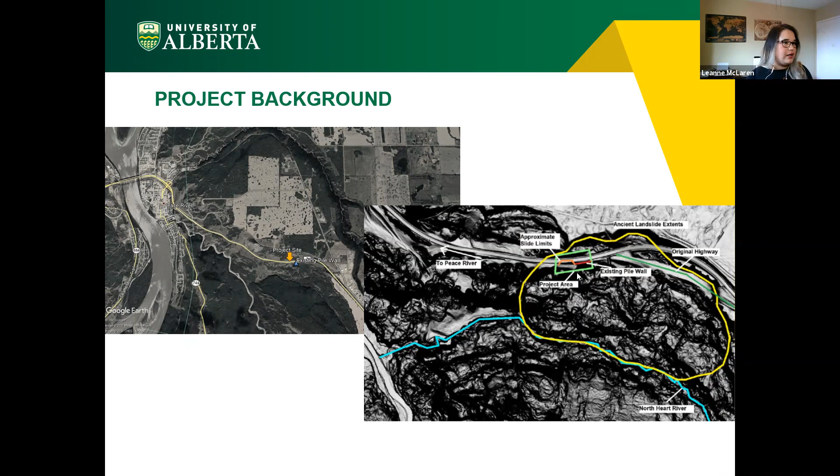These photos were taken in 2016 of the existing cantilever pile wall. In the photo on the right, you can see the slope inclinometers both upslope and downslope of the wall. You can also see that the soils in front of the wall have been creeping downwards little by little.

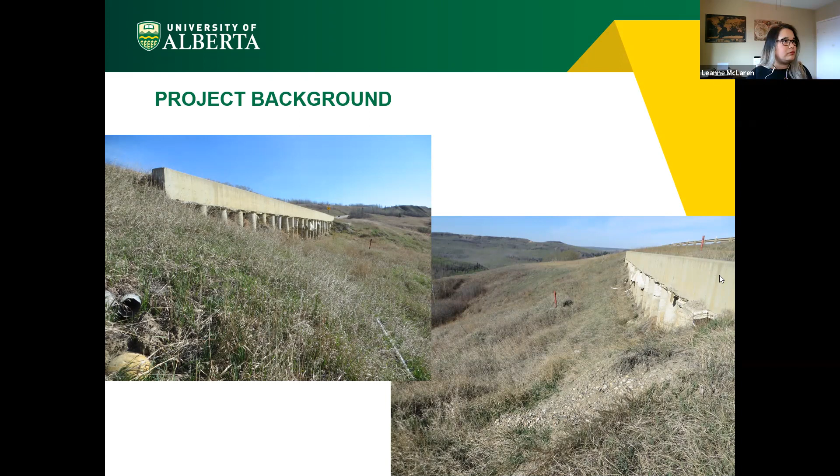Fortunately, or unfortunately, because of the active movement of this slope, there's plenty of instrumentation data dating at least to the 90s. In this zoomed in site plan, you can see the orange line is the existing cantilever wall, and some instrumentation was installed west of the wall in 2010 here.

You can see in the slope inclinometer plot on the right, which shows cumulative deflection on the left and incremental deflection on the right, that there's a distinct slip plane at about 6 meters depth in SI 10-4, which is highlighted in yellow here on the left. So you can see that jumping out right there.

Many of the SIs installed between the 1990s up to 2014 showed slip planes between 6 meters and 18 meters depth, and some were sheared off at these depths, with maximum deflection rates as high as 87 millimeters per year before they were sheared off.

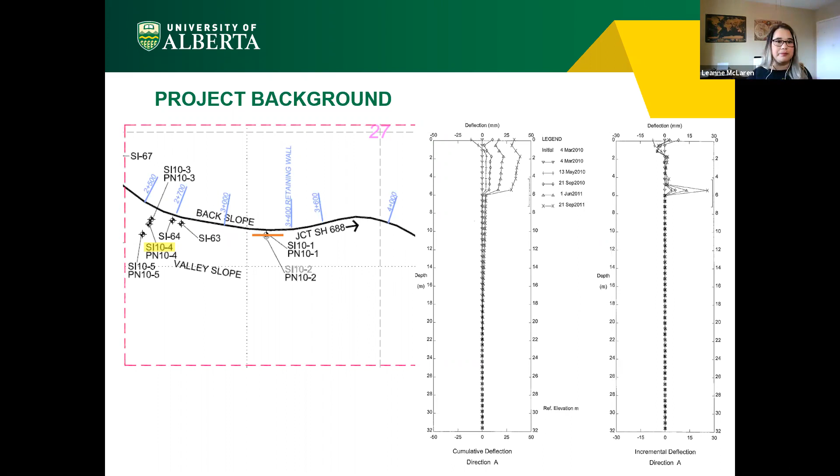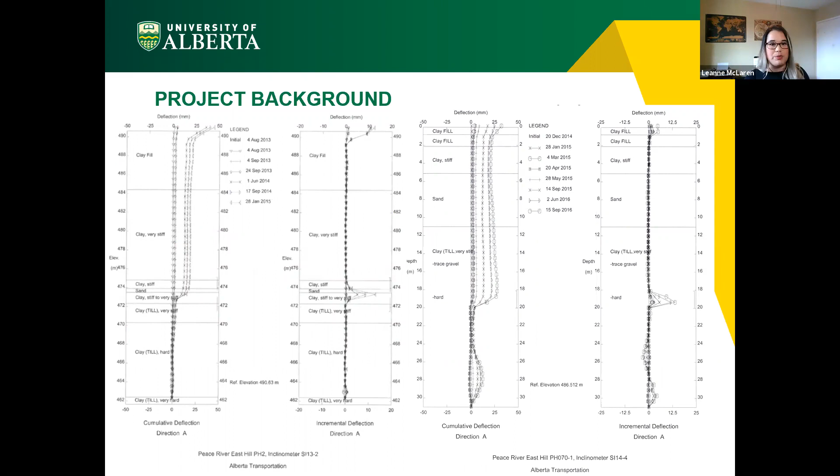Here's a couple of other SI plots prior to construction. The one on the left is SI 13-2, which was just upslope of what would become the new wall, and the one on the right is downslope to the west of the section of wall I'm looking at. Both plots show a potential slip plane at around 17 or 18 meters depth.

With instrumented evidence of continued slope movement and cracks and dips being noted in the highway during the annual geohazard inspections, it was decided in 2015 to build a wall to protect the highway from the slope movement.

The picture on the right is a little dark, but you can see in both of these pictures several longitudinal cracks running along the highway, caused by loss of embankment support on the downslope side. If this wall wasn't constructed, the highway would continue to be affected by the slope movement.

Three geotechnical investigations were carried out between 2010 and 2014 to determine soil conditions and possible causes of the slope movement. Generally, the stratigraphy followed the log shown here, starting with embankment clay fill on top, over medium to high plastic lacustrine clay, over varying thicknesses of silty sand, which was on top of very stiff glacial clay till.

Several holes encountered colluvium at the surface, which makes sense considering the active slide terrain. As with many of the landslides in the Peace River Valley, the slip surface was found to be between the high to medium plastic lacustrine clay and the very stiff clay till layers.

The water table was generally 9 to 10 meters above the assumed slip surface. So water pressure on the slip surface could speed up weathering, as well as the loss of cohesion in the clay materials, and could provide lubrication along the slip surface once it was formed.

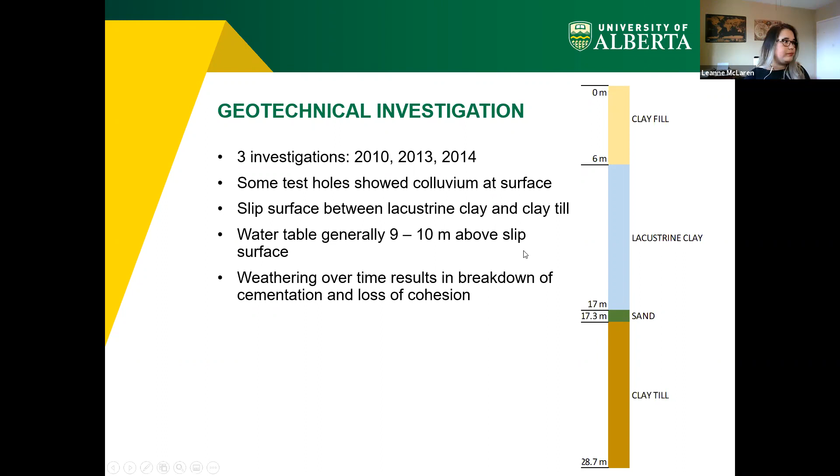During the preliminary engineering phase, SlopeW, the limit equilibrium software, was used to estimate the lateral resistance required in the wall anchor system to increase the slope to an acceptable factor of safety. This lateral resistance was then converted to an equivalent lateral earth pressure with a triangular distribution, as shown here to the left of the wall, acting above the slip surface on the back of the wall.

This earth pressure load would be resisted by the passive earth pressure in front of the piles and below the slip surface, based on an ultimate resistance of 1600 kPa in the high plastic lacustrine clay and 2500 kPa in the clay till. The piles and anchors themselves were designed by another structural engineering firm, so I wasn't privy to all of the details or parameters used in design, except for these values shown here.

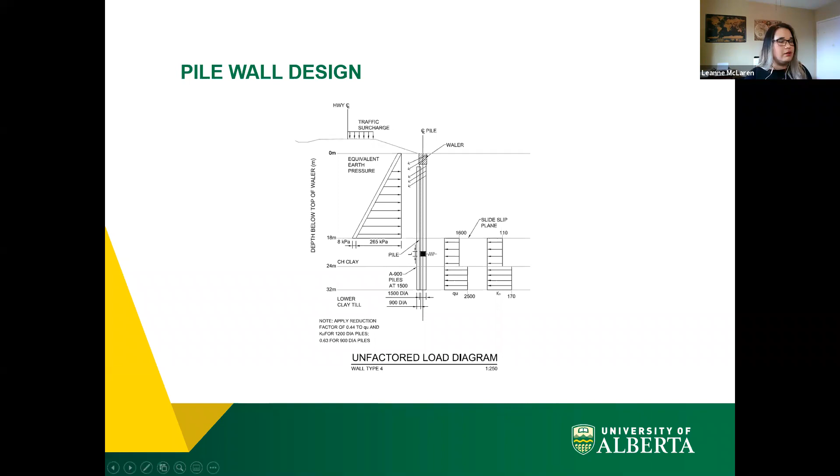So now I'll tell you why I keep saying section 4. The wall was designed in 6 sections in total, with varying designs based on depth to slip plane. There were so many different aspects that went into the design of each section, so I focused my project on section 4, which had the deepest slip surface, the most robust pile design, and the most levels of anchors.

The anchors were 32 millimeter diameter high strength threaded steel stressing bars with a 12 meter long bond zone and varying free stress zones, so that the bond zone was beneath the slip surface.

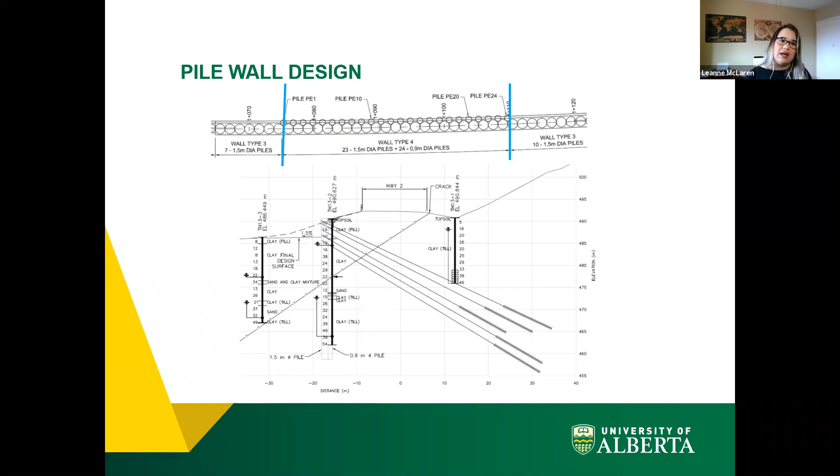Service loads were designed to limit deflection of the pile head to 50 millimeters or less. Some deflection was anticipated during construction as the soils in front of the wall were excavated and the anchors were locked off.

The soil in front of the wall was excavated in benches so that each row of anchors could be installed and locked off prior to excavating to the next bench. After all 5 rows were installed and locked off, the soil was backfilled to cover the lowest row of anchors.

You can see in the photo on the left, the soil has been excavated down to the 5th level of anchors. To the right, they've backfilled it to cover that 5th row of anchors, which would be the final grade. You can also see in the middle the instrument monitoring station here.

All of the instruments installed within the piles and the pile wall were wired into this data logger, which is powered by a battery and solar panel, so that taking readings at the biannual geohazard inspections would be a simple download from this station.

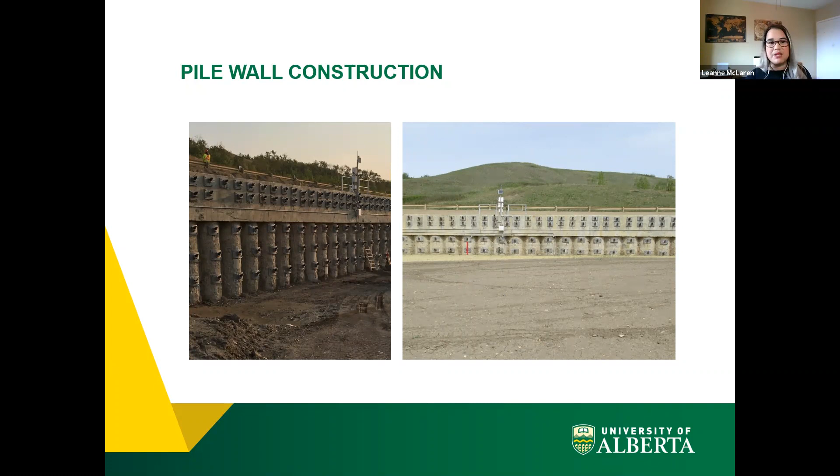Between 1996 and 2015, 29 different instruments were read annually to assess the condition of the slope movement at this site. This includes 12 slope inclinometers, 3 of which were sheared off shortly after installation, 15 pneumatic piezometers to measure groundwater levels, and 2 standpipe piezometers. There were more SIs installed prior to 2010 in this area, but they had been sheared off or damaged.

During construction, several instruments were installed in pile P74, which is roughly in the center of wall section 4. 28 vibrating wire strain gauges were installed as shown in the photo. We've got 14 gauges on the upslope side of the cage and 14 gauges on the downslope side of the cage. The PVC conduit here is where the SAA, or Shape Accel Array, will be installed after casting of the pile.

The strain gauges would measure microstrains along the pile between 0.2 and 28.2 meters length. The SAA would measure deflections in the pile similar to a slope inclinometer, and a vibrating wire load cell was installed on each anchor to measure the loads on each anchor during and after construction.

All of the instruments were read during construction as part of the observational approach to determine whether or not the pile and anchor designs were behaving as expected or if the design needed a little bit of tweaking. Since completion of construction in 2017, the instrument data has been downloaded twice per year. However, since the instruments are connected to the automatic data logger, this gives us daily readings for each instrument.

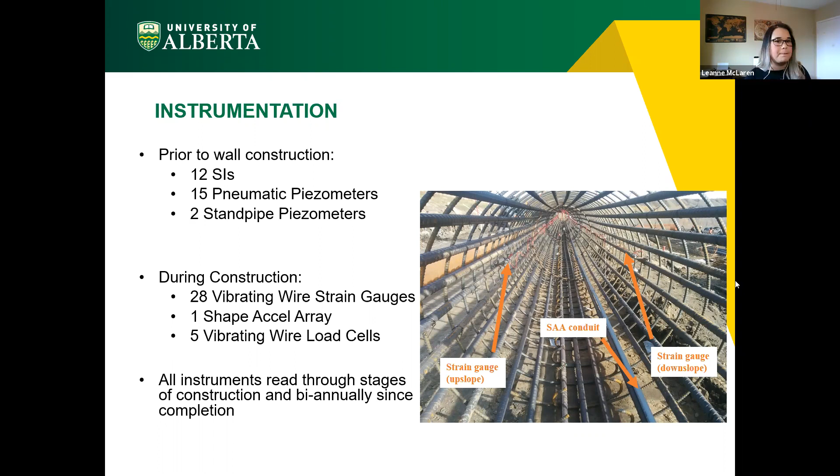I'm now going to show you the instrument data that was collected during and since construction, and look at how it compares to the expected performance of the wall during design. I'll start with slope movement as measured with the slope inclinometers and Shape Accel Array. I'm sure many of you are familiar with these instruments, but for those who are not, I'm just going to give a brief description of what they are and what they do.

On the left is a picture of the slope inclinometer system. A PVC casing is installed into the ground with its bottom lower than the slip surface. At the time of reading, the probe, which is the long metallic thing on the bottom, is connected to the cable and lowered to the bottom of the hole, with the wheels following along grooves in the casing. During casing installation, the grooves would be aligned so that they point in the direction of the highest slope movement. Once the probe is at the bottom, it's pulled up in increments. Some SIs come in 0.5 meter lengths, and the one we use on this project is 2-foot increments.

In each increment, the probe measures the tilt of the casing. These measurements are sent to the handheld data logger unit and stored, and this process is repeated until the probe is at the top of the casing. Then it's lowered again 180 degrees to the first reading, and the process is repeated. Knowing the distance between measurements and the angle from vertical, the horizontal displacement is derived.

The Shape Accel Array, shown on the right, or SAA, is a series of rigid sections of constant length that's permanently left in the hole. Each section can move laterally, but they can't twist, and they have gravity sensors that can measure tilt in the X and Y directions. The X, Y, and Z position of each segment is calculated so that you can see the overall shape of the array, similar to an SI plot.

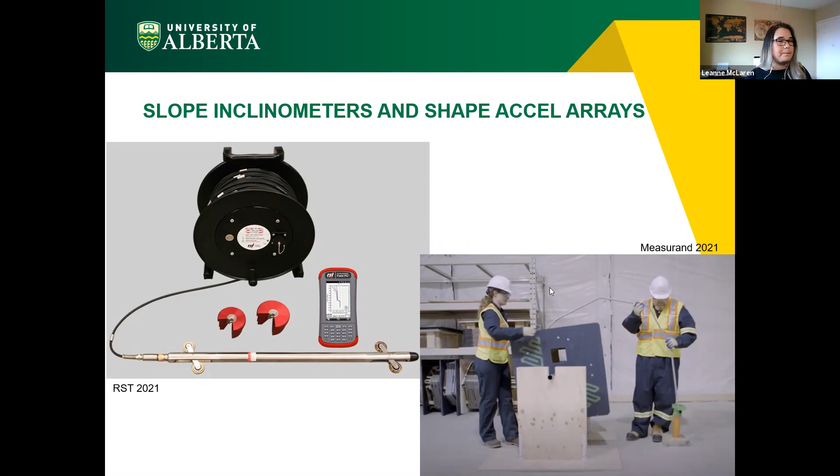The SI plot shown here is from test hole 13-2, which is highlighted in the picture on the left, prior to construction of the wall. From this plot, there's clear movement between 17 and 18 meters depth, near where the lacustrine clay interfaces with the clay till. The maximum incremental deflection at this spot plots at nearly 25 millimeters downslope.

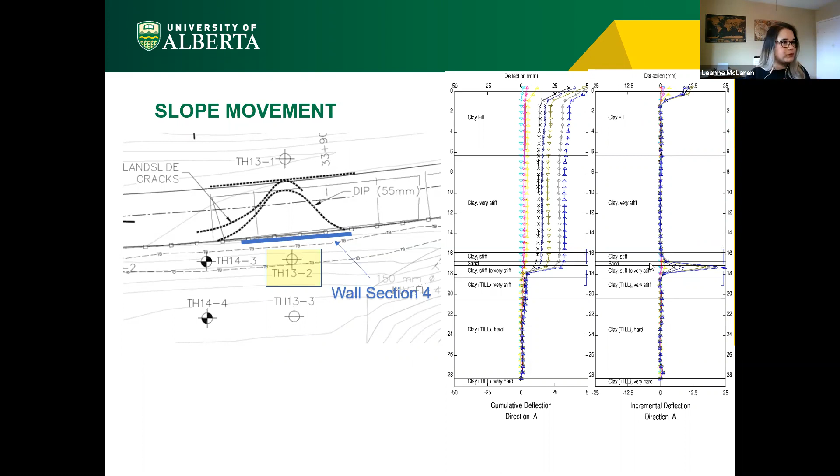This plot shows the change in measured displacement over time in test hole 14-4 at the slip plane elevation, which is just west of wall section 4. In this plot, the displacements are shown to increase steadily from January 2015 to June 2017, which corresponds to the time of anchor installation and lockoffs in June 2017. The deflection rate levels off between June and September 2017 as construction is completed.

Then it starts to increase again, but at a much slower rate between September 2019 and September 2020. The significant slowing of deflection rate in an SI downslope of the pile wall suggests that the pile wall has reduced the driving force on the portion of the slide mass that is downslope of the wall. Some creep is still going to occur, shown by the gradual increase of deflection with time, but the wall is expected to protect the highway, which was the main concern for this project.

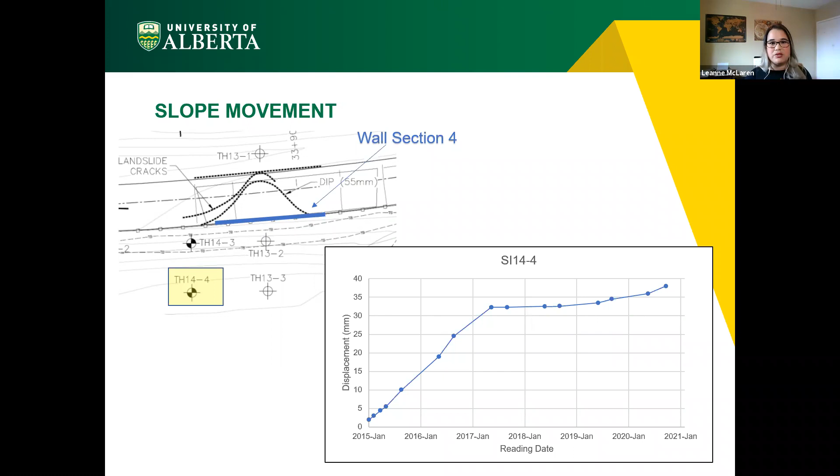This is the SI plot for the same SI as the last slide. In the cumulative plot on the left, if you look closely, you can see the red arrows here. This shows a big step of displacement between September 2016 and June 2017 when construction was taking place. Then you see all of the lines sort of on top of each other here, showing that the movement ceased, or at least slowed down significantly, until between September 2019 and June 2020, when displacement started up again, but more gradually.

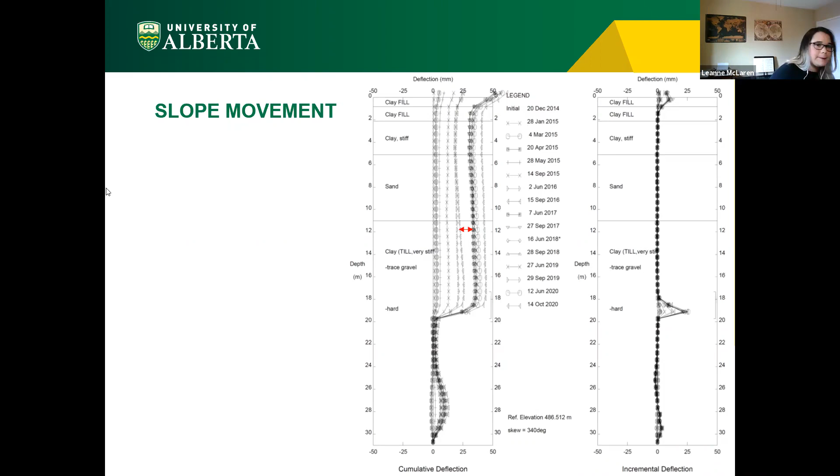Over the period after construction leading up to 2020, some redistribution of the loading had occurred, reducing the pile deflection to 7 millimeters towards the highway and increasing the deflection near the slip surface to 7 millimeters downslope. These deflections are well below the serviceability limit of 50 millimeters of pile head deflection.

I should note that an SI is encased in soil, so it's going to have a different response to slope movements than the SAA, which is encased in concrete. However, this does show the pile deflections are within acceptable limits.

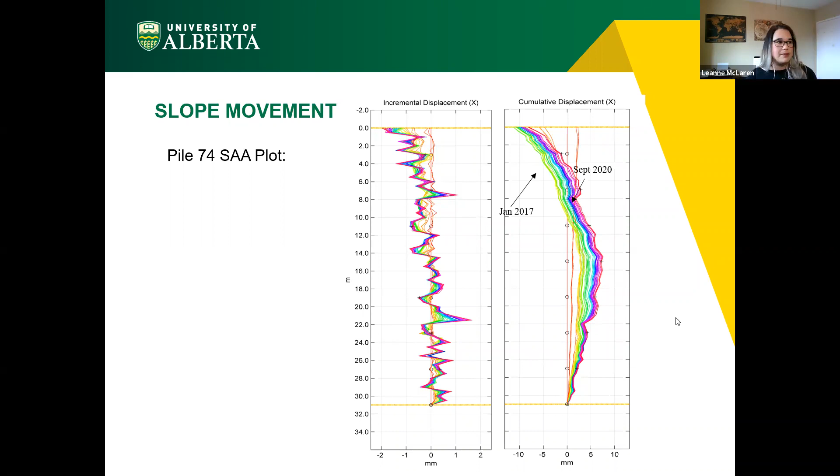Strain gauges can provide a few data sets. Total strains show the actual microstrain at each instrument. Bending strains are the changes in strain between the current and original readings. And the bending moments can be calculated from the bending strain using the flexural stiffness of the concrete.

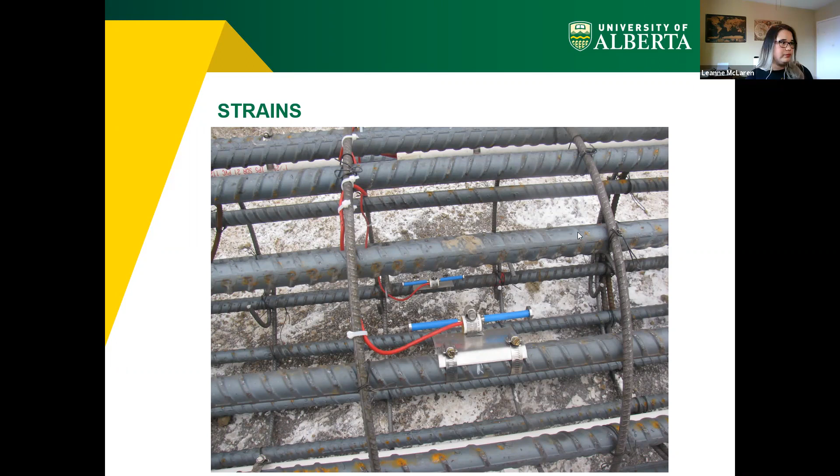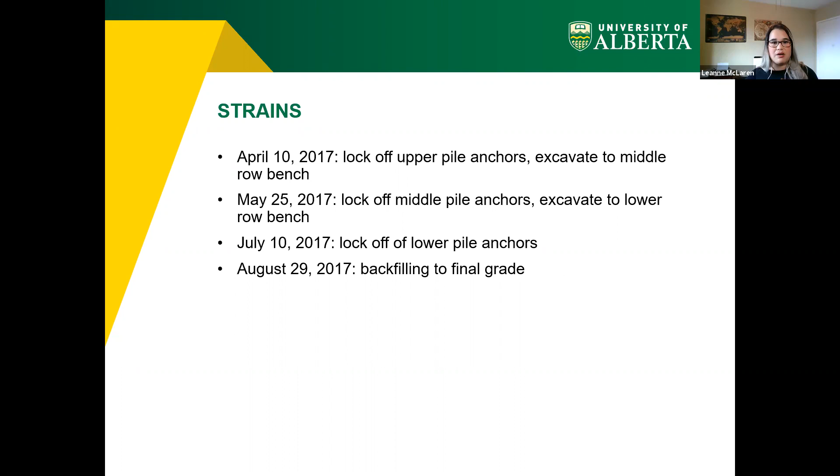So I selected specific dates to look at the strain gauge data so that I could see how certain events were affecting strains in the pile. April 10th, 2017 was immediately after the upper pile row of anchors were locked off and excavation to the middle pile had begun. May 25th was after the middle row of anchors were locked off and excavation to the lower row began. July 10th was after the lowest row of anchors were locked off, and August 29th was when backfilling to final grade was underway.

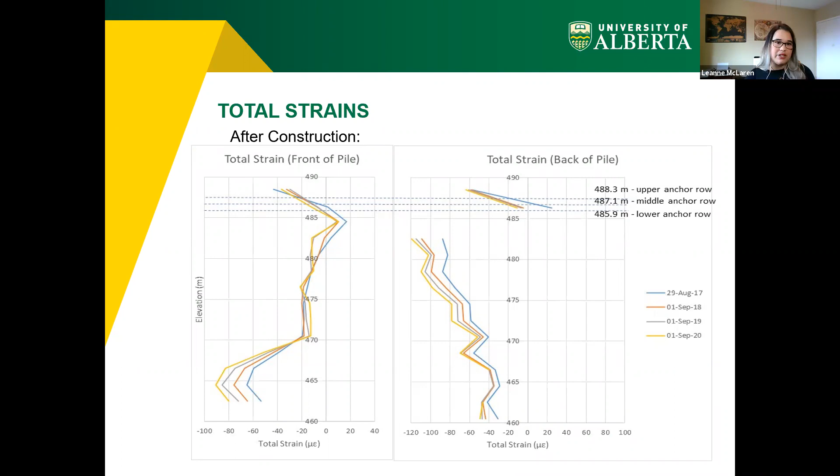These plots show the total strains after construction. Unfortunately, one of the strain gauges near the anchor elevation stopped functioning during construction, so we're missing some of the information here. But looking at this plot, the total strains starting at the finish of construction in August 2017 to our last reading in September 2020, the tension at the anchor elevation is continuing to decrease at the back of the pile, just below the anchor elevations. The strains appear to be gradually increasing in compression.

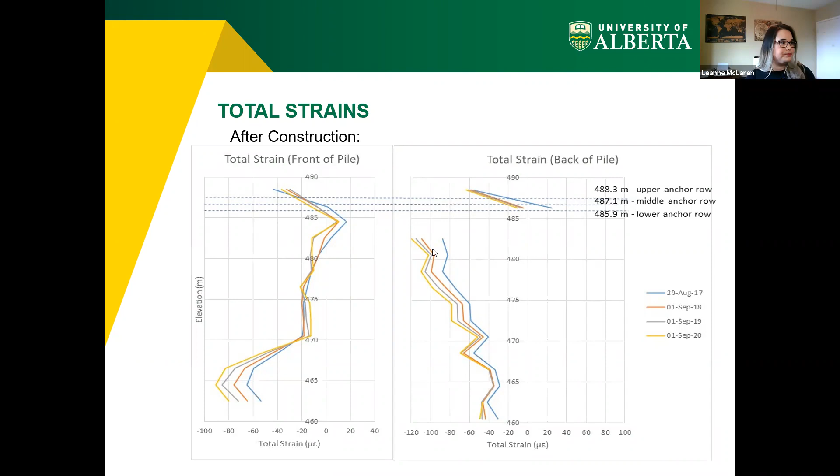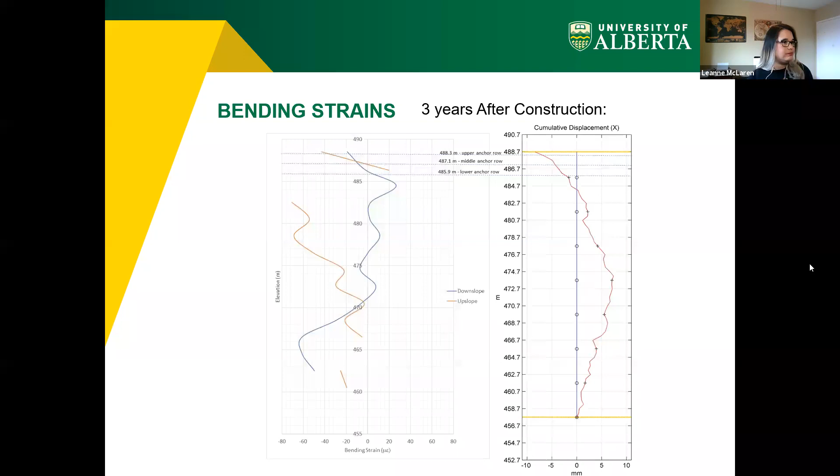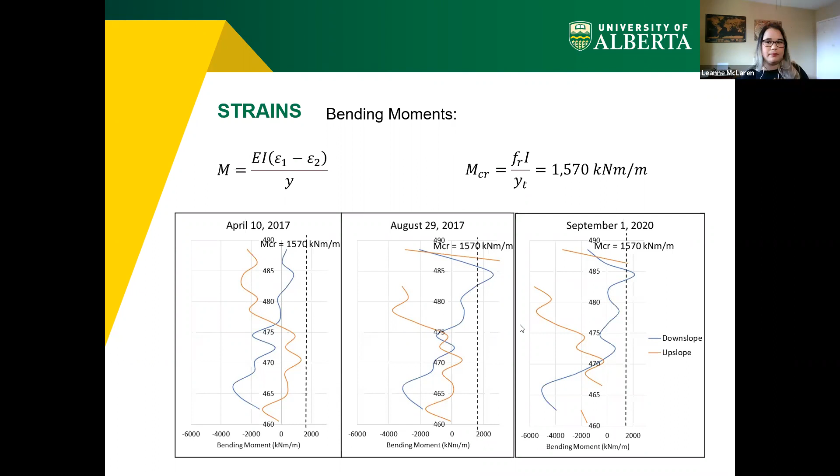These load cells were installed on all 5 anchors on pile P76, and load readings were set to be taken once per day.

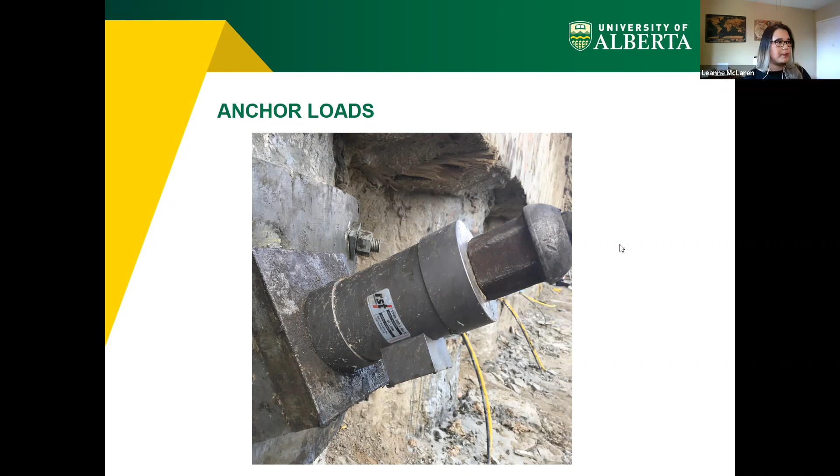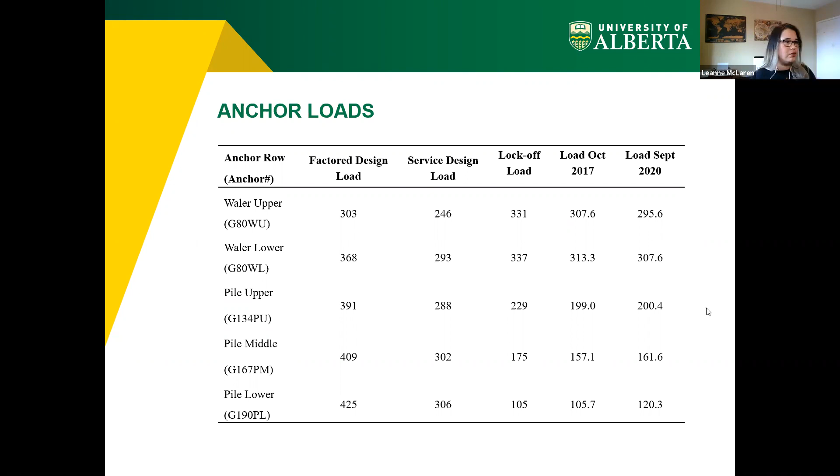The lower anchors were locked off below the design loads under the expectation that as the construction is completed, these anchors will pick up more load over time. As you can see in the final column, which is the most recent reading, they did act as expected, and the upper anchor slackened and the lower anchors increased in load over time.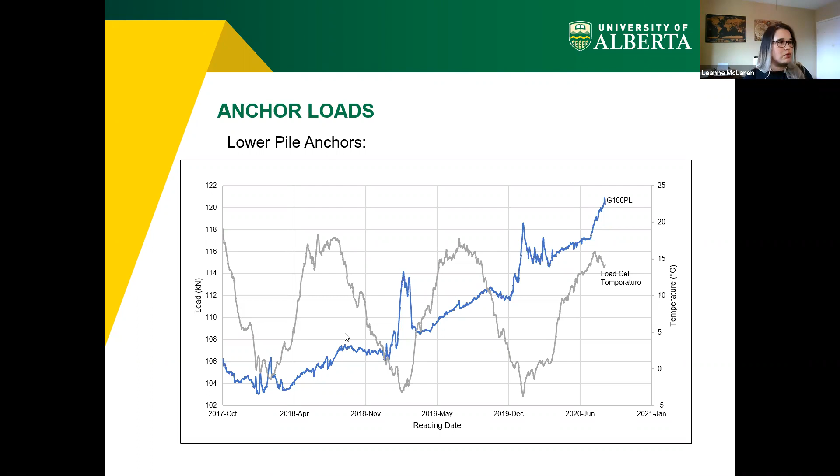I think I talked too fast. So with all this information and plots aplenty, what did I find out?

Based on the slope inclinometer and Shape Accel Array data, there does appear to be some creep movement downslope of the wall, which is expected and is not going to impact the highway.

Total and bending strains from the strain gauges show some inflection points along the length of the pile, but the strains are not of a magnitude that would be of concern.

Bending moments show that there is some minor cracking in the pile around the anchor elevation, but that cracking is not significant enough to affect functionality of the wall.

Finally, the anchor loads show that the anchors are picking up loads as expected and well within design limits. The overall conclusion: the wall is performing as expected and will likely continue to perform its function of protecting the highway.